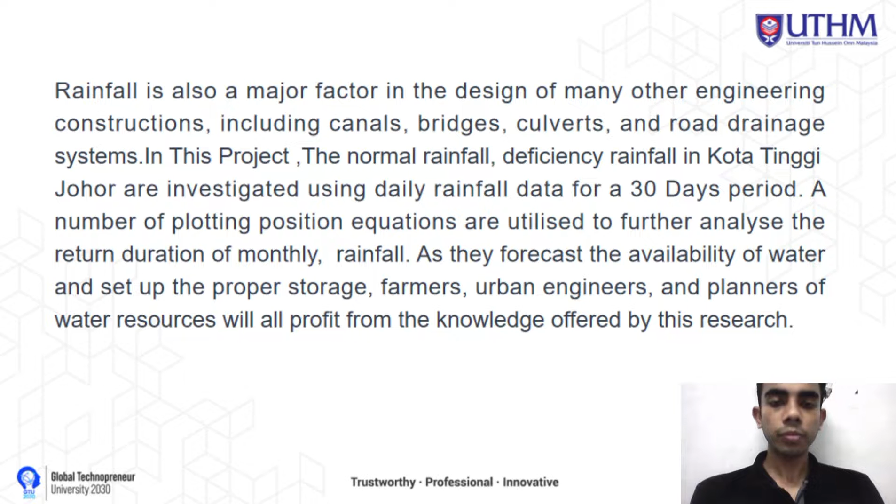So I will present the methodology part. The data that we collect is from the Department of Irrigation and Drainage website, which we collect for almost 30 days, and then we use this data to calculate the mean areal rainfall and generate the hydrograph.

We also use Google Earth Pro to find the catchment area along with parameters such as slope and length of reach that we use to calculate the storm duration, and we also use it to find the cross-section area. Then with all the parameters we obtain, we calculate the peak flow, and we also calculate the estimated water river discharge at the maximum level.

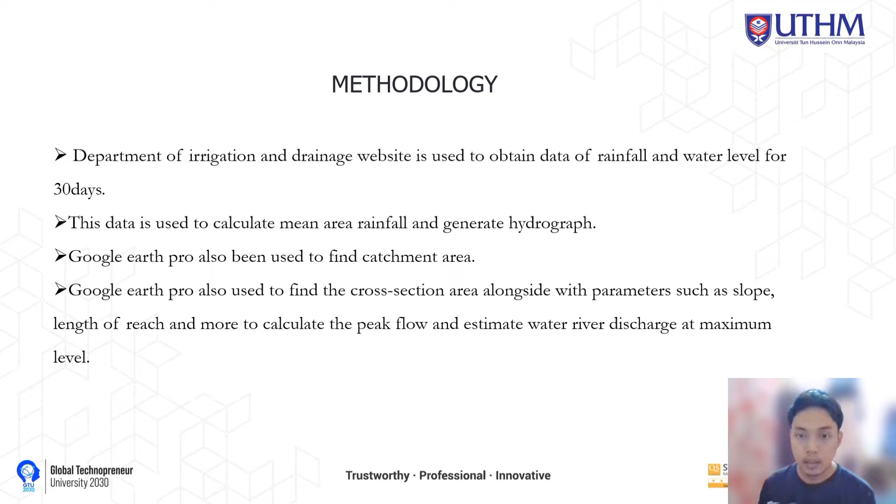Today I'm going to present the data presentation. The data were collected from 7 May 2022 until 7 June 2022. The location that we proposed is Kota Tinggi, Johor. There are 3 rainfall stations, which are Station Hujan Pasak, Station Hujan Sungai Johor, and Station Hujan Ladang Nam Heng. There is one water level station that we propose, which is at Sungai Johor, Kota Tinggi. We collected the data from the end of the day, which is 11 PM until 12 AM.

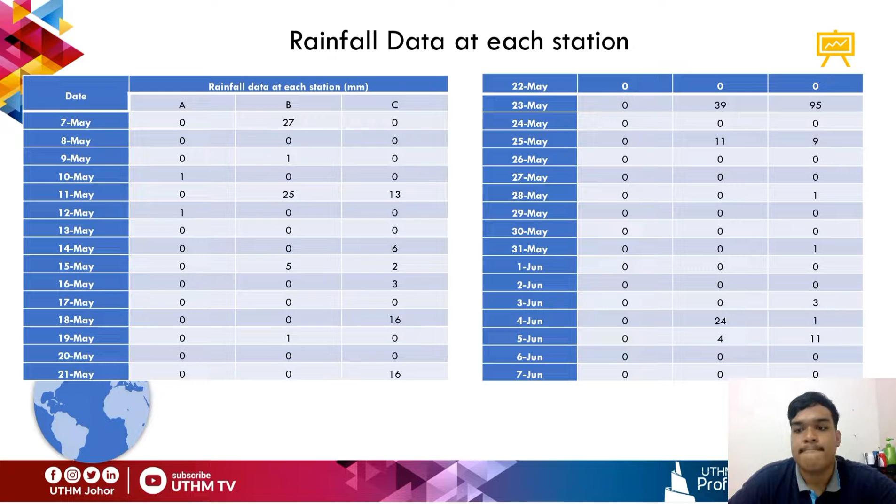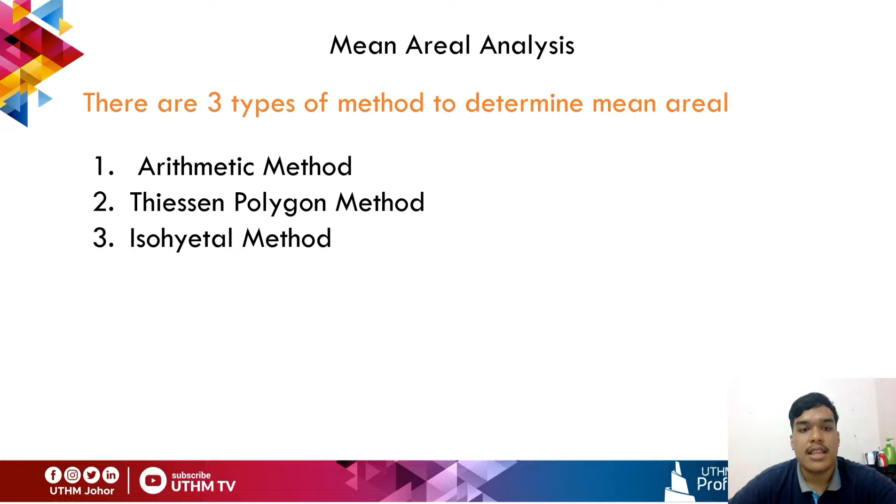From our arithmetic method analysis, we select 7 days that contain rainfall data, and then we total up the 7 days data, and then we average across the 3 stations, and we got 81 millimeters for the rainfall intensity.

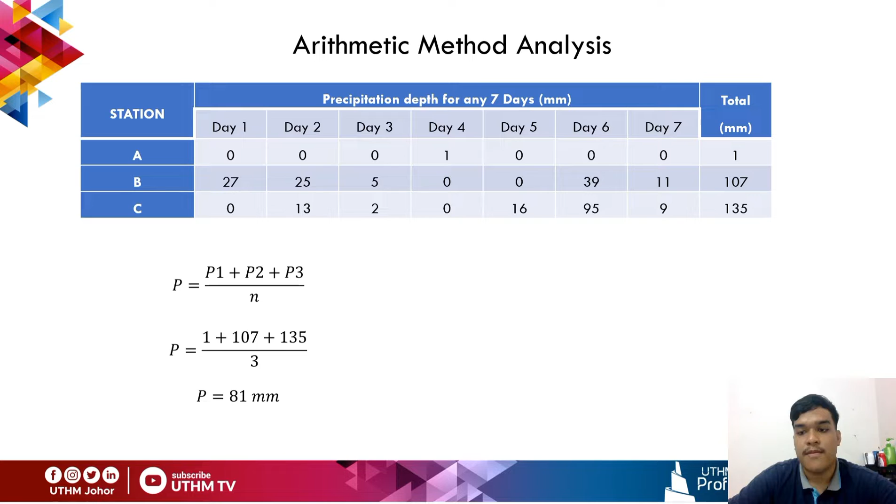Now the Thiessen polygon method analysis. First of all, how do we get the area of the polygon at each station? Firstly, we connect each precipitation station with a straight line. After that, we construct perpendicular bisectors, and then we get the area of each polygon. After that, we multiply it by the precipitation value, and then we divide it by the total area. And now we got the precipitation of 87.42 millimeters.

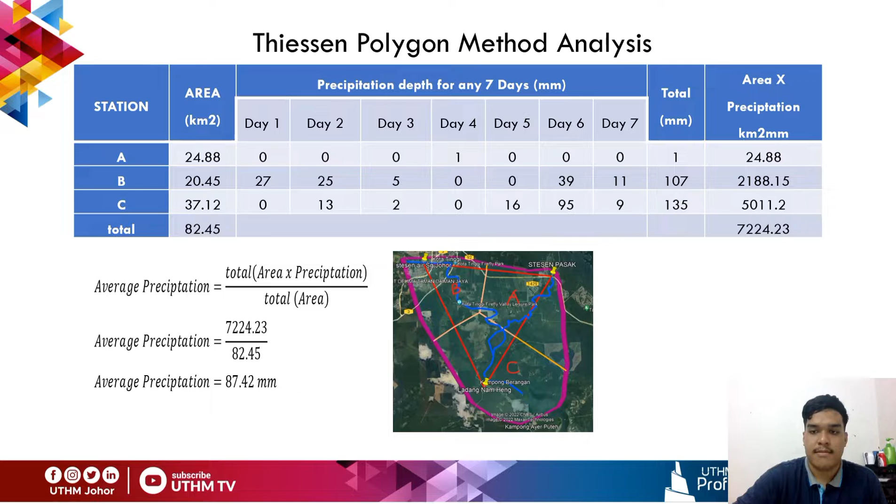Lastly, the isohyetal method analysis. We use an isohyet interval of 30 mm, and then we got the area from Google Earth Pro by forming the isohyet lines, and then at each interval we got the area, and after that we calculate the precipitation as area times precipitation value at each isohyet interval, and then we divide it by the total area, and we got 86.8 millimeters.

So from the three analyses, the isohyetal method analysis was the most accurate to get the average precipitation, which is 86.8 millimeters. Thank you.

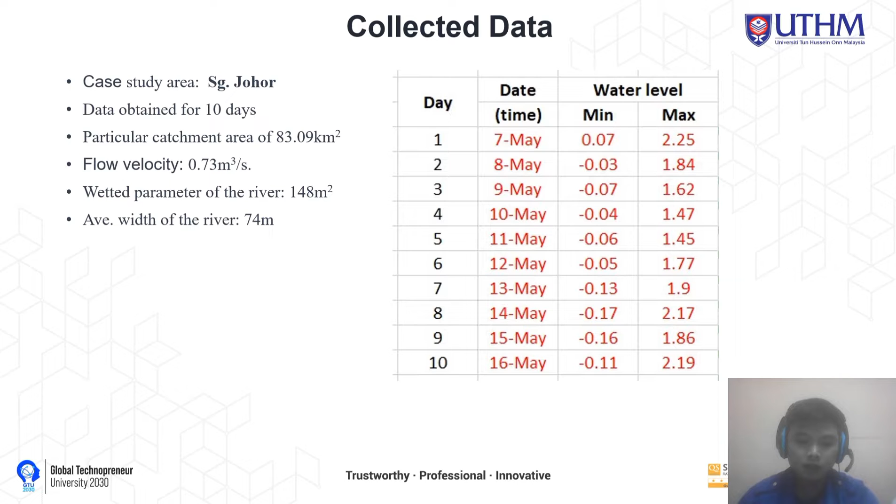The wetted perimeter of the river is 148 meters square with the average width of 74 meters. Okay, after that we proceed with the calculation. Note that we were not given data for Q total flow, so we have to calculate it ourselves. As you can see from that table, based on the minimum and maximum water level values, we have made an average for each day. This is because we need to get the R value by multiplying the average water level with the average width of the river, which is 74 meters. By that, we were able to get the Q total flow value.

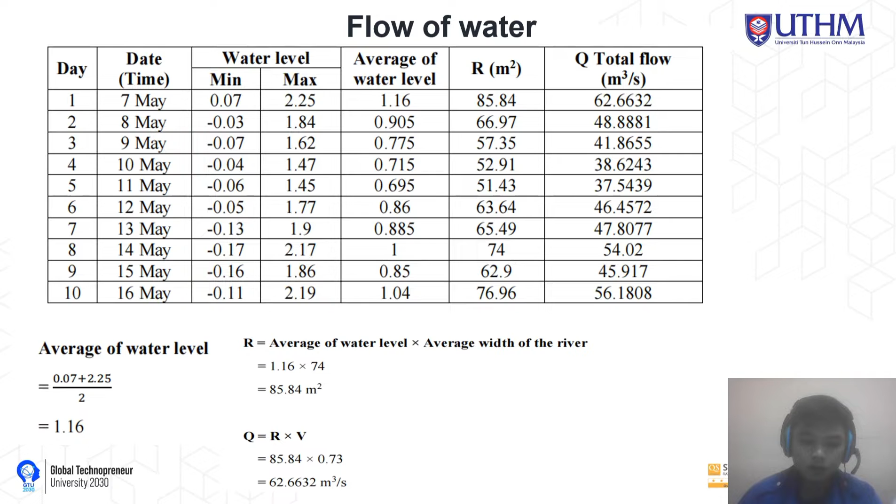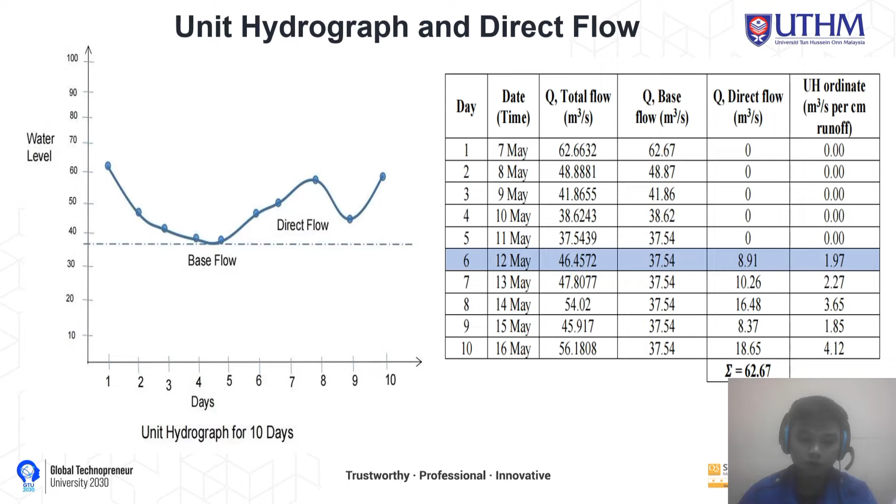Okay, next we proceed by making the hydrograph so that we can obtain the values for Q base flow and Q direct flow. From that, we can get the values of UH ordinate by dividing Q direct flow with equivalent runoff depth. Okay, lastly, we plot the hydrograph based on the values of UH ordinate, and this is how the hydrograph looks, with the axis of discharge versus time.

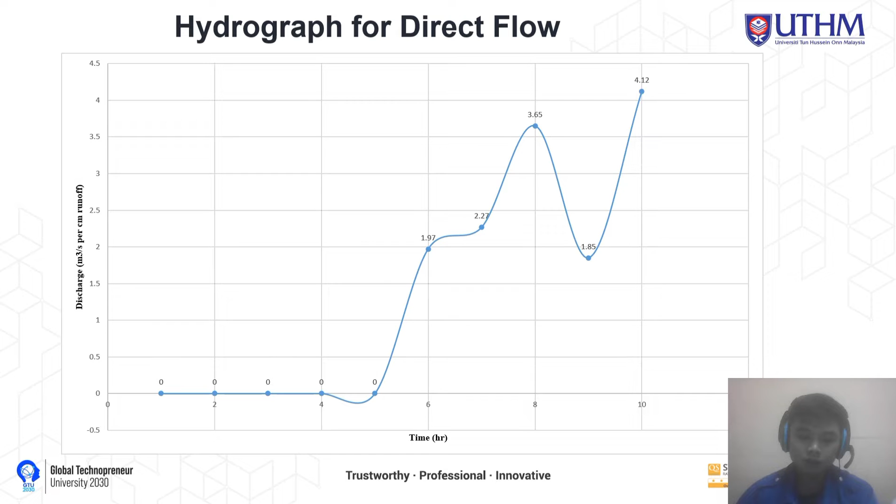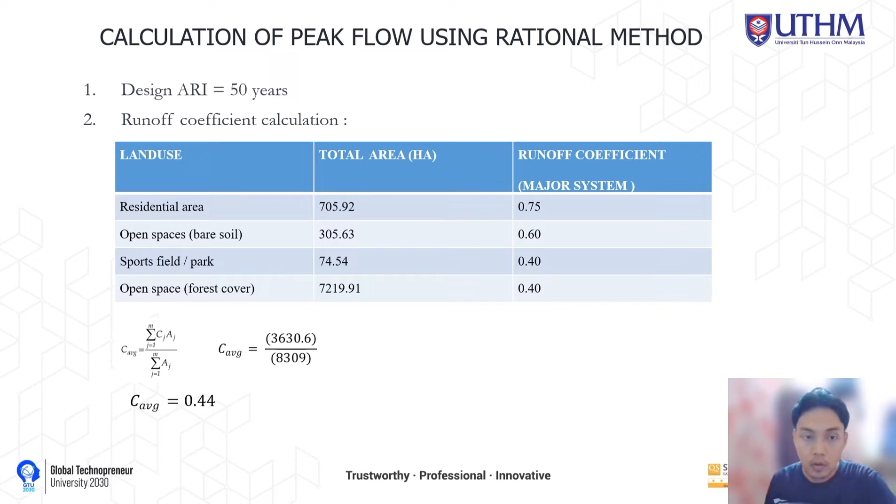So I will continue the presentation for calculation of peak flow using the rational method. For design ARI, we choose 50 years and then we do the runoff coefficient calculation. We divide the area into 8 different areas and then we categorize them into 4 types of land use, which are residential area, open space, bare soil, sports fields or park, and open space for forest cover. As you can see, this is the type of coefficient that we obtain, and then we use the formula C average to calculate the C average for all of the land use, and we obtain 0.44.

Next is the estimation of time of concentration, TC. For the TC, the formula is T naught plus TG plus TD, and for T naught we get 11,020.85 minutes, while for TG it is 1,000.86 minutes. For TD it is 35.02 minutes. To calculate TC, we sum all the values of T and we get 12,056.73 minutes.

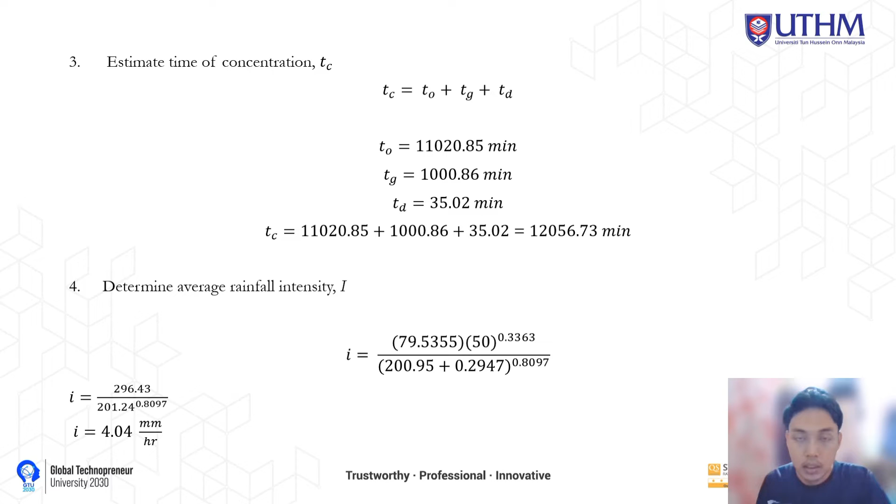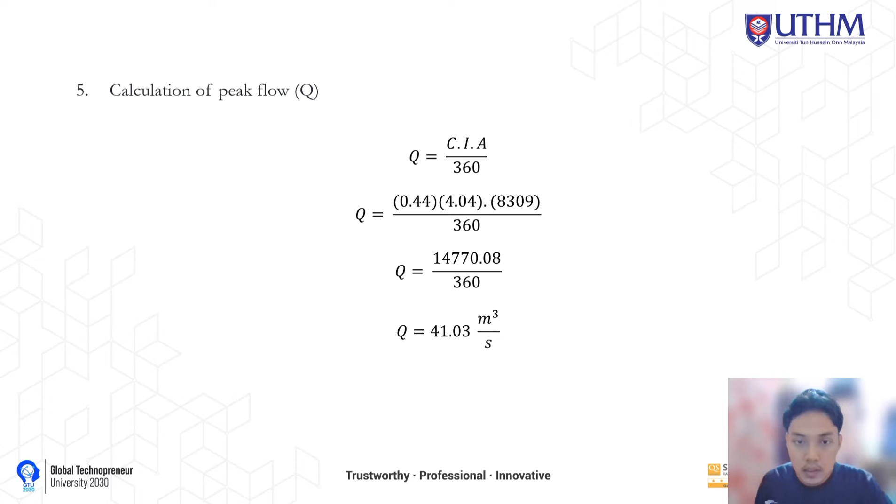So proceed to the average rainfall intensity calculation. We use the formula given in the MASMA and then we insert all the coefficients that we obtain, also from the table in the MASMA, and the value of I we obtain is 4.04 millimeters per hour. Finally, for the calculation of peak flow, we insert all the values obtained into the formula Q equals CIA divided by 360, and the final value of Q is 41.03 meters cube per second.

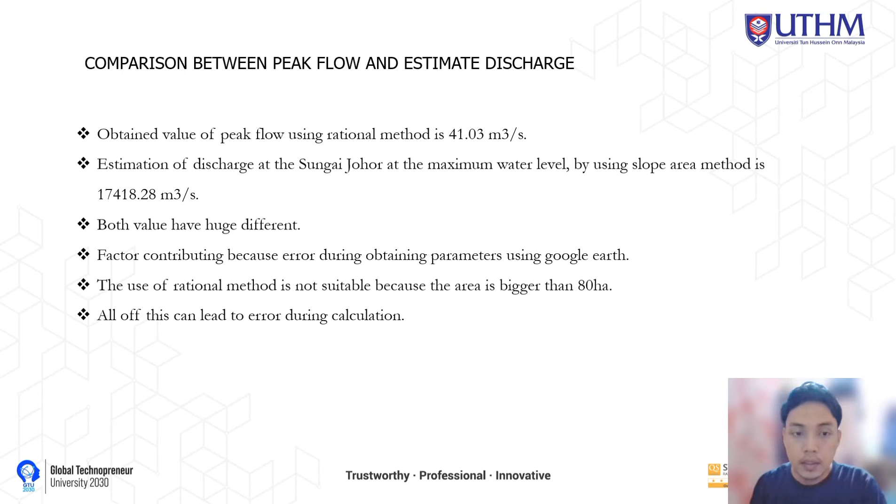Comparison between peak flow and estimated discharge. For the peak flow, we get 41.03 meters cube per second, and for the estimation of discharge at Sungai Johor, we get 17,418.28 meters cube per second. We can see that both values have a huge difference. This may be because of errors in obtaining parameters such as TC, or maybe lack of reach using Google Earth, and the rational method is also not suitable to calculate the peak flow because our catchment area is bigger than 80 hectares. All of these factors can lead to error during calculation.

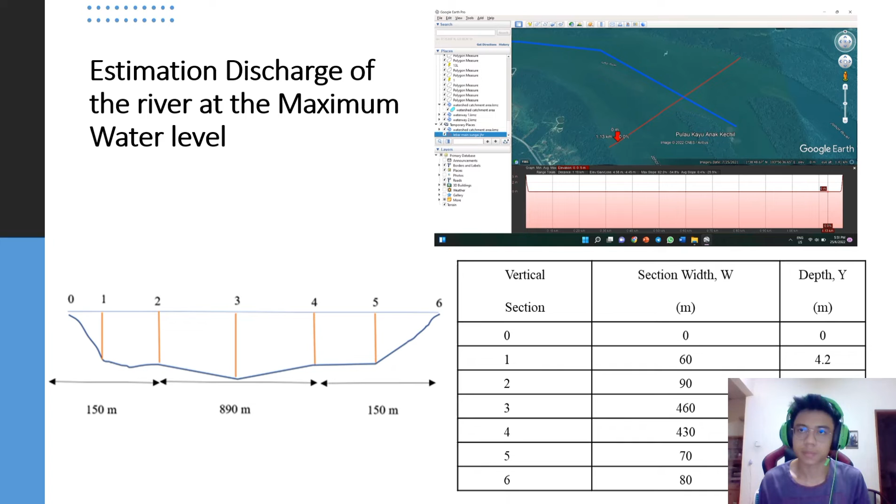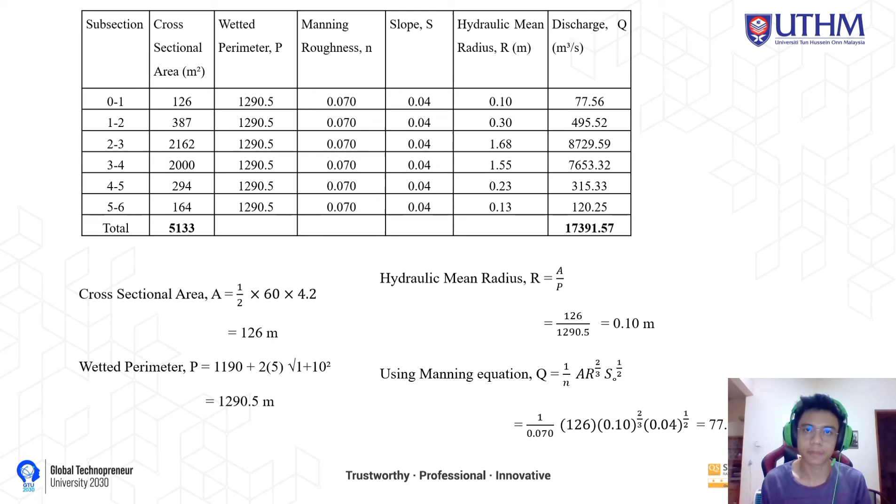Move on to the calculation. Based on the table from the previous slide, we make a new table to calculate the cross-section area, the wetted perimeter, hydraulic radius, and lastly the discharge using the Manning equation. We calculate all the data for 6 sections, and we get a total cross-section of 5,133 and a total discharge of 17,391.57.

Okay, for the discussion of our project based on all the calculations, the highest minimum water level we get is negative 0.39. The highest maximum water level was 2.25. The mean area rainfall was 81 mm. Using the Thiessen polygon method, the value we get is 87.42 mm. Using the isohyetal method, the value we get is 86.8 mm. The total direct flow we get is 62.67 meters cube per second, and the UH ordinate is 1.97. Lastly, for the peak flow discharge analysis, we get 41.03 meters cube per second, and the maximum discharge estimation is 17,391.57.

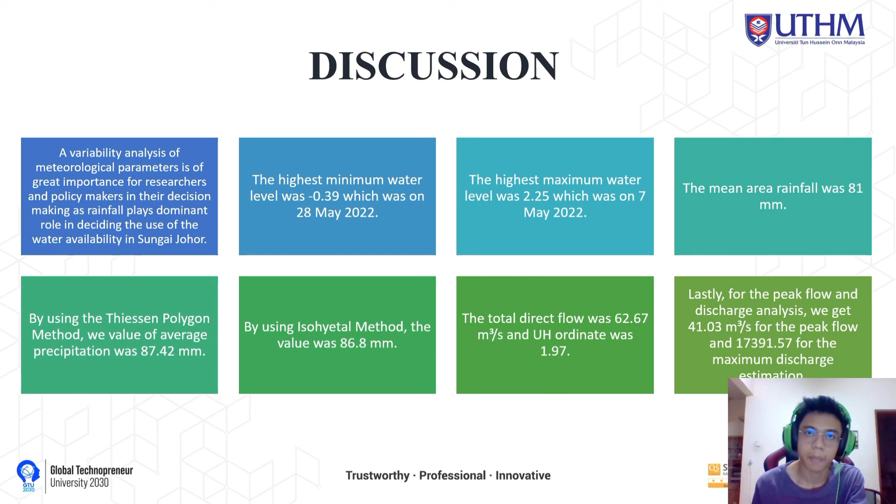Okay, in conclusion, the fluctuation of climate parameters is a recurring phenomenon in the study that we conducted on Sungai Johor. Therefore, we should take into consideration the rainfall variability of the area in general in climate change adaptation strategy.